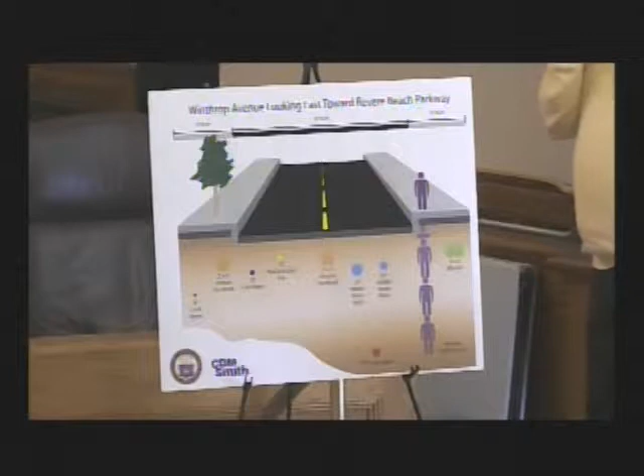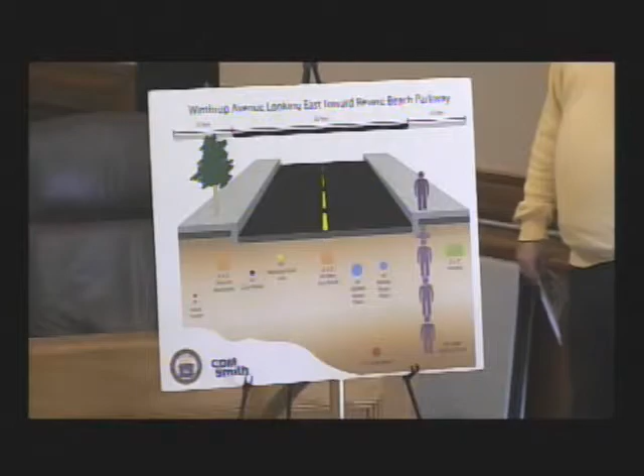Sad to say, it's going to be quite an inconvenience for people living or working in that area, because this is going to, at times, close the entire stretch of Winthrop Avenue from around Victoria Street all the way to Route 16.

But it is a necessary repair. It's not something that the city is undertaking because we want to—we absolutely have to. The reality is, as we sit here today, that pipe that collapsed is at risk of further collapsing up the street if we don't get on this right away.

And should that happen and the ground shifts as a result of this collapse, some of the impacts could really be catastrophic in that area, which is why we wanted to call this public meeting to bring this all to your attention as to what actually is happening and how we will be proceeding ahead in terms of fixing this problem.

We're confident and we know for sure that at the end of this, you're going to have a much better and functioning system than you currently have. I wish it didn't have to come by way of an emergency repair, but nonetheless, that's what we have to deal with, and that's what we have been doing.

I'm very confident with the help of people that are here, and I'll introduce some of them now who have taken time to be with us. Some will actually be speaking, some are here to answer questions, and some will be presenting what you have here in front of you.

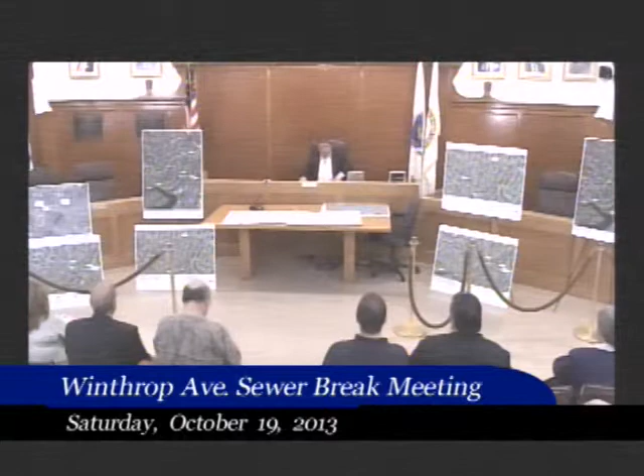We have first off, who I'll call up in a couple of minutes, the ward councilor from this area, Richard Penta. We have our superintendent of public works, Don Goodwin; our city engineer, Nick Rystrom; Ward 4 city councilor, Steve Reardon; city councilor at large, Bob Haas; city councilor John Correggio; and City Council President Ira Novoselsky. Anybody else that I'm missing? From CDM Smith, we have John Doherty, who you'll be hearing from in just a couple of moments. And I think that's it—I think I've covered just about everybody.

I want to thank them, obviously, for being here and participating in this important and very, very critical project that the city has to undertake.

It is going to be a rather lengthy project, though I've been assured by CDM Smith, our engineering firm, along with Albanese Construction, our contractors, that they are going to go as quickly and deliberately as they possibly can to make these repairs—obviously, though, making them in a proper manner. We want to go as fast as we can, but we don't want to go so fast that we don't do the job the right way. I have assurances from both of those firms that they will proceed as quickly and as deliberately as they possibly can.

But I want to assure you that we as a city are going to do everything we possibly can to mitigate the amount of pain and aggravation that you as residents of that area are going to have to endure. As I said at the outset, I wish I didn't have to be sitting here having this conversation with you all, but in the not too distant future, this will be a memory, and you'll have a better system than you've had for a number of years.

Hello, my name's John Doherty. I'm with CDM Smith, and I'm the project director for this project. We got the portable microphone working, so what I'm going to do is assume that you may not have all the details of what happened, and I'll touch again on what the mayor said and just explain the issue and try to show you what the solution is. Another engineer with me, Mike Judici, will get into the details of the repair, and then I'm going to touch briefly on the traffic issue, and then we'll open it up for questions. Thank you.

So as I go along here, I'm going to pull some boards up next to me just to talk, and I'm going to try to make this somewhat informal as I can. So when we're done here, feel free to come up and look at these posters, and we'll be hanging around to answer specific questions.

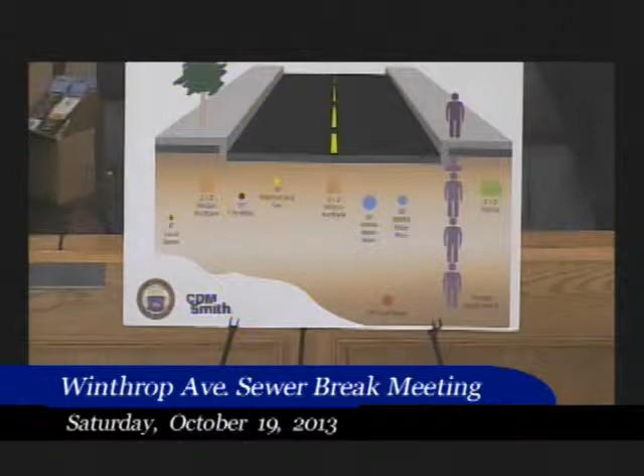Right out in front of the park, there's an 18-inch old clay sewer pipe. That sewer pipe is over 100 years old, so it was being inspected and cleaned out. As it was being inspected and cleaned out, we saw that it was in poor condition. A section of it actually collapsed, and so the city came right in, DPW came in, set up portable pumping equipment. So when we looked at where that sewer was, normally you'd just say okay, we collapsed the section, how do we go fix it?

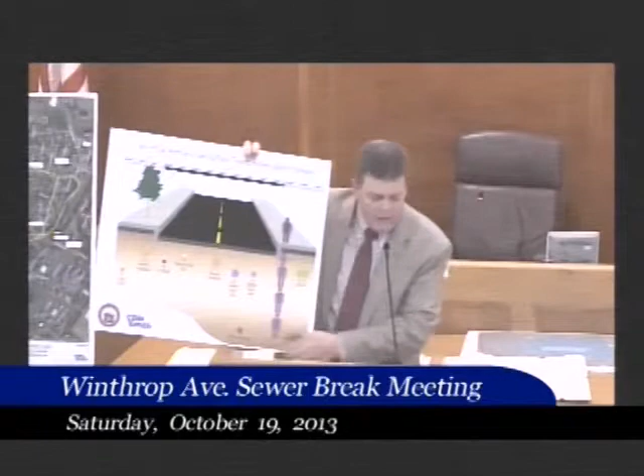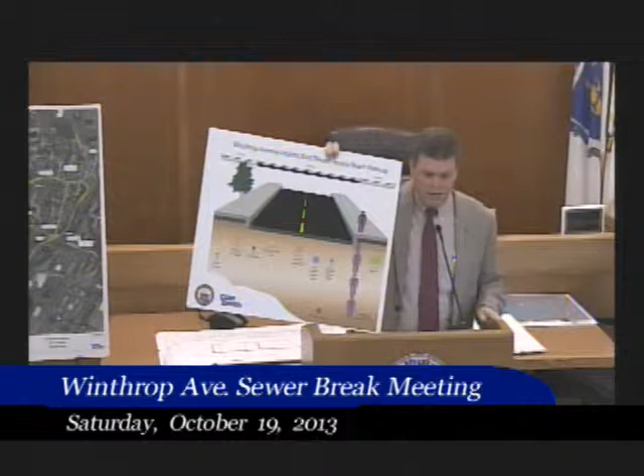So as the mayor indicated, this is a very deep sewer. The red line on this sketch here shows you where the sewer is down at the bottom. What made it difficult to fix is that there are several other utilities in the street, but most importantly there are two rather large MWRA water distribution mains that run down Winthrop Ave. They serve Revere, but they also serve some other communities on the North Shore. One is a 16-inch water main, and one is a 24-inch water main. So that in itself, those water mains are 10 or 12 feet above this sewer, which made it difficult to get underneath to that specific location.

Seeing that condition, talking to the MWRA about how that would impact them if we lost one of those water mains, it would basically wash out the whole street and fill the park up with water. It would be a legitimate disaster. So what we decided to do was, seeing the condition of the pipe and how poor it was, and knowing that it would eventually need to be replaced, instead of doing the one spot repair, we would replace the pipe from approximately the corner of Elm Street up to Revere Beach Parkway. To do that, we need to get away from the MWRA water mains and get out in the other travel lane.

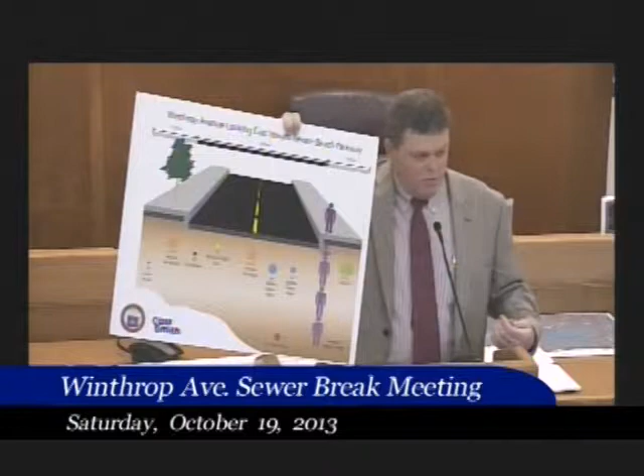The yellow line on this sketch represents the new sewer main. A contractor will come in and most likely start at the Elm Street end, working his way down towards Revere Beach Parkway. At any time, only about 30 feet of the street will be opened up. There's a daycare center and maybe a half a dozen houses that are immediately impacted.

The road will remain open to local traffic from Beach Street down to about Victoria and down to Elm when it can be kept open. There'll be traffic signs and indications so that people on Beach Street heading for Winthrop won't be able to just travel down there. It's going to be local traffic only, and those people will be encouraged to go around, either to the Parkway or to Harris Street or other routes they may know.

This will affect approximately 3 bus stops on Winthrop Ave. Right now we've been working with the MBTA to figure out how the buses would be rerouted, and once we know that, we'll provide that information to you.

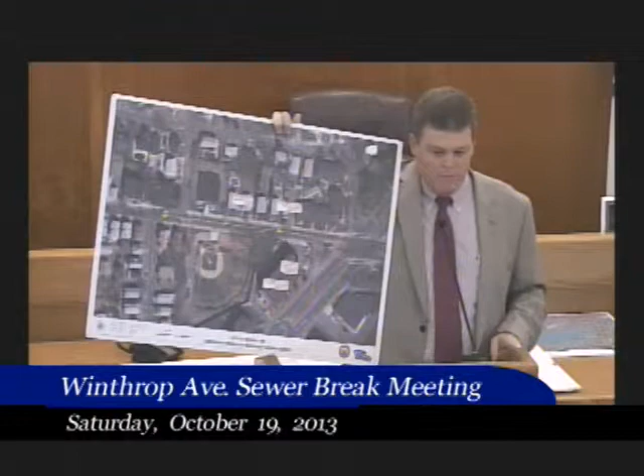How many feet are they placing? Approximately 900 feet—about 700 feet along Winthrop and about 200 feet that will be jacked from Winthrop out into Revere Beach Parkway. The estimated cost at this time is around $1.5 million, but that number's not final—we need to sit down with the contractor, and we've provided him some information.

Okay, so before we keep going with questions, let me stop here and turn it over to Mike Judici, who's with CDM Smith. He's been working on the detailed design and will provide you with a little more information. I'll touch briefly on traffic, and then we'll be happy to talk and answer questions as long as you'd like.

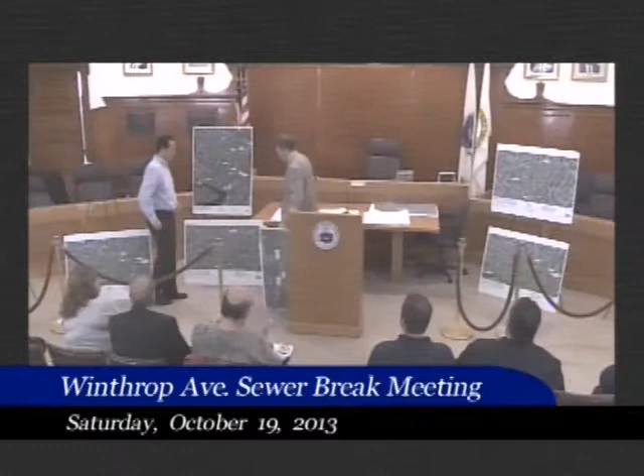Thanks, John. Again, my name is Mike Judici from CDM Smith. I don't want to go into a lot of great detail here, but I'll pick up on some of the points John mentioned, and as he indicated, I'll be available to answer any questions either during this meeting or after. As John indicated, this is a difficult area to do this construction.

The plan here, hopefully you can see it, shows Winthrop Ave from Elm Street, and this gets partway down to the Parkway. The break occurred roughly in this location. The existing sewer is on the south side of the street. As John said, it's currently below two very large MWRA water mains, so it would not be possible to fix that pipe where it stands without impacting those mains. The plan is to install the new sewer on the opposite side of the street, in the northern travel lane, which is actually heading west.

In order to do that, as John indicated, there's a gas main and a water main that will need to be relocated. So the first part of the project includes relocating that gas main—it's a 10-inch cast iron main on the northern side of the street. They're going to replace it with a 12-inch plastic gas main. We've been coordinating with National Grid to get that underway, and they're working on mobilizing their crews as we speak.

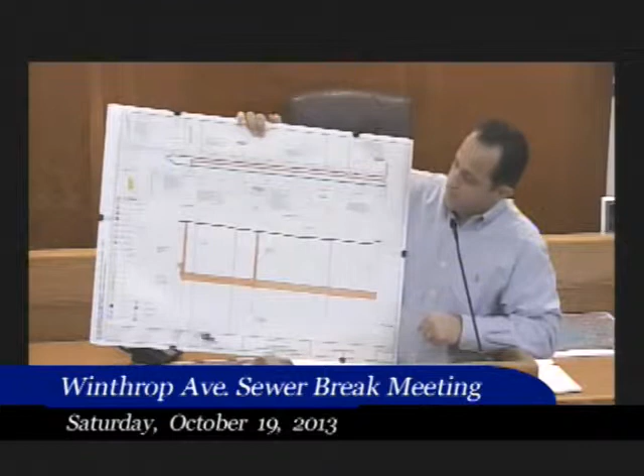This is essentially a plan and profile view showing the relative depth of the new sewer. It's going to be a 36-inch sewer, roughly 24 to 25 feet deep along the stretch of the replacement. We'll connect to an existing manhole located at the Elm Street intersection and divert the flow to the northern travel lane, then down toward Revere Beach Parkway.

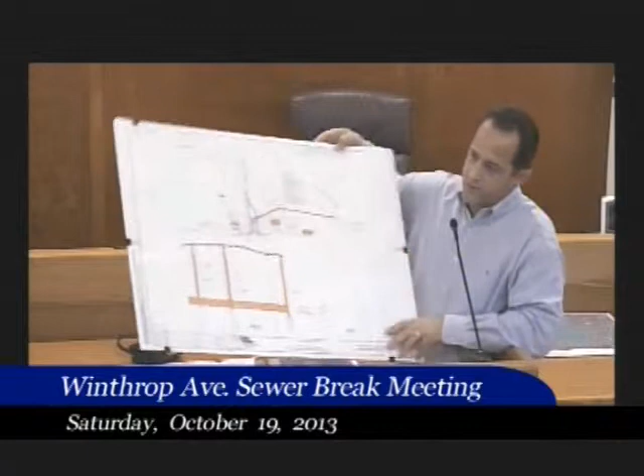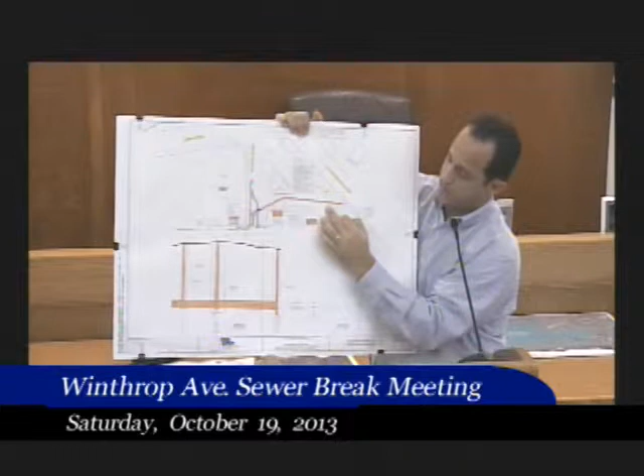As John indicated, that portion of the construction will be what we call open cut—that's typically what people are used to seeing. It will literally be a 25-foot deep trench cut in the street on that northern side of the road. Once we get down further toward the parkway, we're going to utilize that small turning lane that allows you to go onto the parkway and install what John referred to as a jacking pit at this location.

That allows us to install sewer in two directions—toward the Revere Beach Parkway interceptor and toward Winthrop Ave. So the idea is that this portion of the alignment will not be open cut construction, with the exception of the pits, but that pipe will be pushed in from those pits underground without disturbing the traffic above ground.

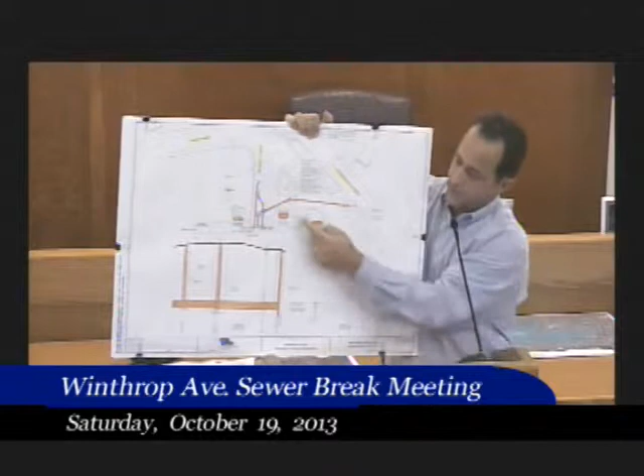That allows us to avoid having to excavate around those MWRA water mains as we cross them. The pipe will be pushed beneath those pits from one to the other.

This shows roughly the limits of the gas main relocation, shown in pink, and the water main relocation, shown in blue. The gas main will happen first. The water main, because it's going to be in the vicinity of the final sewer location, we're actually going to have to set up some temporary water mains on both sides of the streets to serve all the properties.

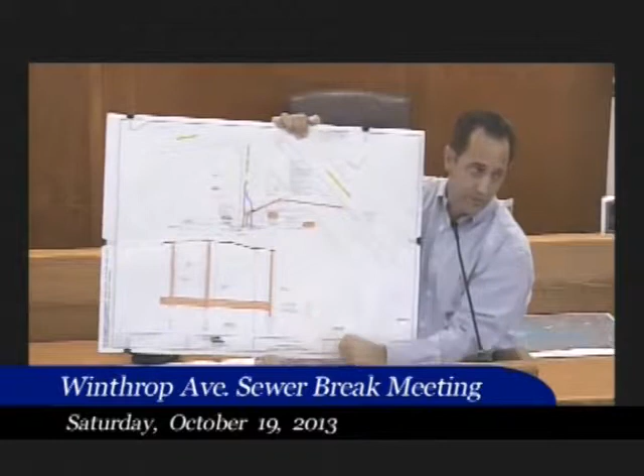During construction, the water service will continue from those temporary mains, and then once the sewer is installed, we'll come back in and put the new water main on the other side of the street.

I think that's it. You want to chat about traffic a little bit, John?

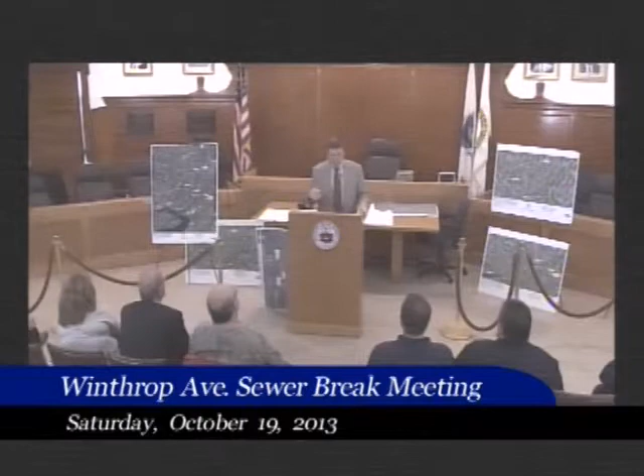I'm just going to touch briefly on traffic and then take questions. On these boards here, we've tried to outline the area. The yellow highlighted area is intended to show what we think would be a good traffic reroute at this point. We understand that people who know the way around the city will use the streets they want to use.

But there will be signs set up so that if somebody is coming from the Suffolk Downs area heading down Winthrop Ave and they were heading to Broadway and unaware of this, there'll be signage to send them on to Revere Beach Parkway and loop around back up to Broadway.

Again, somebody who knows their way around might try to run down Harris Street. Other people might get to that intersection and just take Revere Beach Parkway up to Bell Circle, depending on the traffic conditions. But I think the biggest issue for us, and for you too, is going to be...

How do you not have large vehicles that otherwise wouldn't be on your streets? How do you keep them off your streets? We'll be working closely with the police department, and as we see how traffic is going the first couple of days of the shutdown, we'll work to improve that.

Again, we've reached out to the MBTA. We've spoken with a couple of folks over there, including their bus scheduler and bus router. They're going to sit down with us and see what they can do about making the best improvements to the bus service.

Certainly the buses cannot get down some of those narrow side streets, so we'll work with them on how the buses can get to the bus stops they used to get to, as close as possible, so people don't have to walk an extra 2, 3, or 4 blocks.

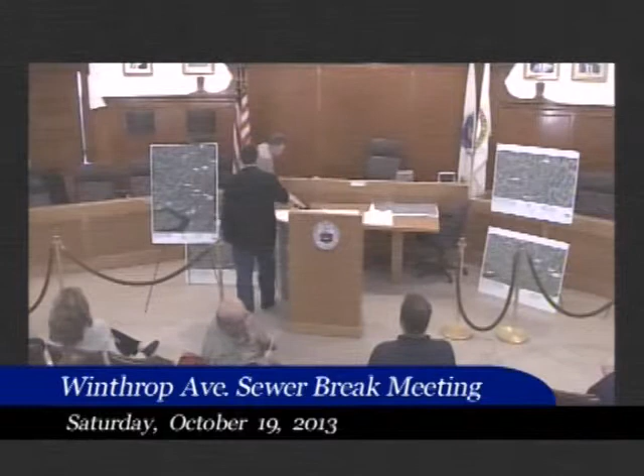You know what? Why don't you go up there and I'll hold the. Okay.

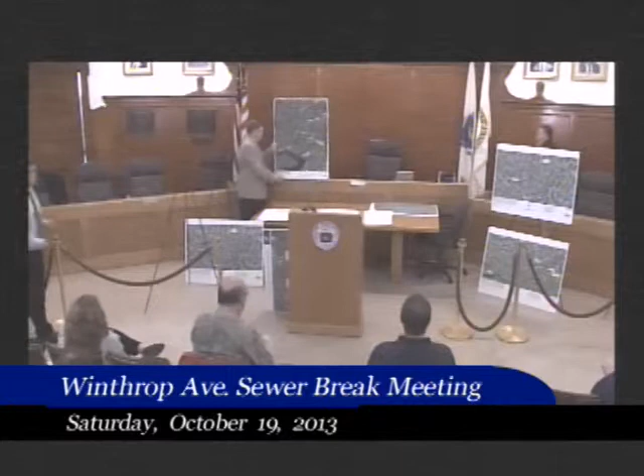What we're going to try to do is avoid the neighborhoods as much as possible. Obviously, we're going to have a problem with the bus routes. We're waiting for the MBTA to come in with their finalized plans. But what we're trying to do, down in the Sewell Street area, Butler Street area, down that way, we want to make it as easy for the people who live in that area as opposed to allowing the commuters to keep coming both ways on Harris Street. So initially, we're going to use Harris Street as a one-way, which will lessen the light cycle at the top of the street, which will keep the traffic flowing out of the neighborhoods as opposed into the neighborhoods. So we're going to try to keep them on Route 16, down to Broadway, or up Route 16 to Bell Circle, and then they can travel on Beach Street the other way to Central or Beach Street.

Yes? I wonder if anything about the lights on Harris Street, Winthrop Ave, and Route 16. Because in the morning and the afternoon, the traffic is totally congested because you've got a full minute coming from the beach and only 30 seconds on the others.

I sit there for 30 seconds every single morning with no cars coming from the beach, none whatsoever. Well, under this current plan, you will not be able to come from the beach to Harris Street. You'll only be able to come up Harris Street towards the Parkway.

The lights are geared so that traffic coming from the beach gets a full minute. Well, it's only 30 — it's a longer light cycle. I'm sure once we get the total plan from the MBTA and the DCR, we will make adjustments to that. As John alluded to earlier, we're going to put the plan into action, see how it reacts to the traffic in the general neighborhood, and we'll make adjustments as needed.

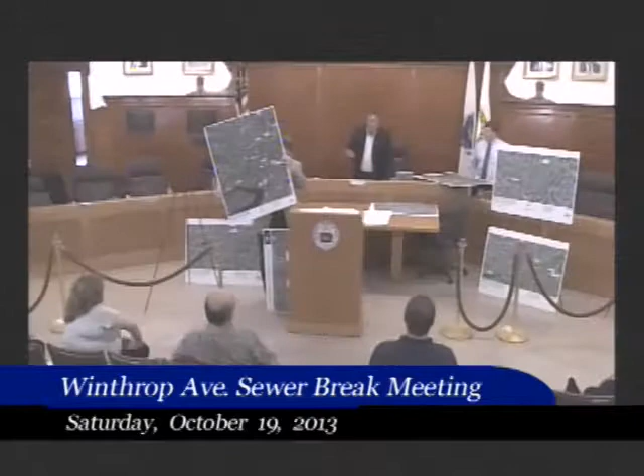That's you're north of Elm Street? I'm embarrassed to say I don't know. Okay, no, you'll be able to get to that portion of Winthrop Avenue. The only section of Winthrop Avenue in the red, John will show you, is from Elm Street to Revere Beach Parkway. Everywhere else you'll have access to. And our customers coming in will have access? The customers will have access coming in, but they will not have access out down Winthrop Ave to Revere Beach Parkway. They will have to go back towards Beach Street. Yes, but they can come in, yes.

Yes, ma'am, we've also been on Victoria Street marking up the sidewalk. Are we going to be dug up in any way, or is that separate from this project? In the last week or so, they've been down there marking on our sidewalks. Is that going to shut down?

So just so you know, when we realized the predicament we were in with the sewer pipe and the MWRA water mains on Winthrop Ave, one of the things we did was think briefly about whether it made sense, financially and scheduling-wise, to put a new sewer down Victoria. We ended up deciding that's not a good idea. But in preparation, wanting to understand our choices, we called DigSafe, the organization that notifies all the utility companies, and put the word out that we wanted DigSafe on Victoria. If it became a realistic solution, the next step would have been taking some borings down Victoria, and then we'd be sitting here talking about digging up Victoria too. But that didn't come to light. We were just making sure we were evaluating the right options to resolve this problem. So they did paint your street up a bit, but we're not going that way.

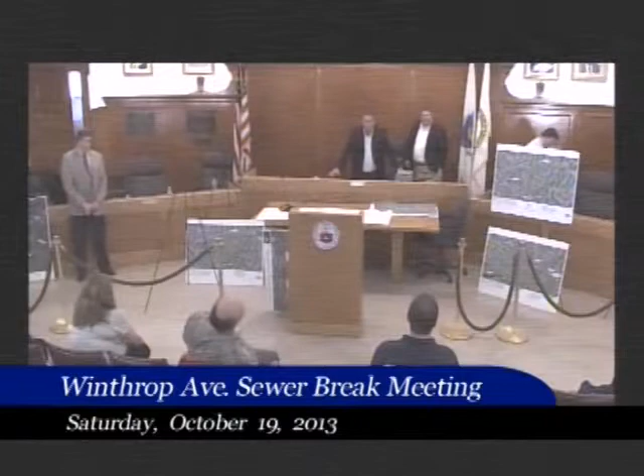Thank you, Donnie. Donnie, thank you. It seems since I left, we had further technical difficulties. I don't know what it is. It's all brand new equipment.

Hopefully most of your questions have been answered. As I said at the outset, it is going to be difficult, and we're going to try and go as fast and expeditiously, with quality workmanship, as we possibly can. We are going to continue to reach out to all of you. This isn't the only time you're going to hear from us. We're going to try to keep you as informed as we possibly can as we get information from the MBTA or from our contractor. This is still a very fluid process.

So please, if you have concerns or questions, you can reach out to my office. You can reach out to the Superintendent of Public Works, he's there to help, or your ward councilors. You'll notice on the programs, for those of you who took one this morning, there are a couple other councilors listed, and I'd like to call on each one of them for some very brief closing remarks.

But before I do, there are a couple of councilors who came into the room since we started. I want to recognize them, I don't think they were here beforehand. I see out in the hallway Councilor Steve Reardon. We have Councilor Zambuto here with us. Councilor Brian Arrigo came in, and I think that is it, right? Councilor Correggio, were you here at the beginning?